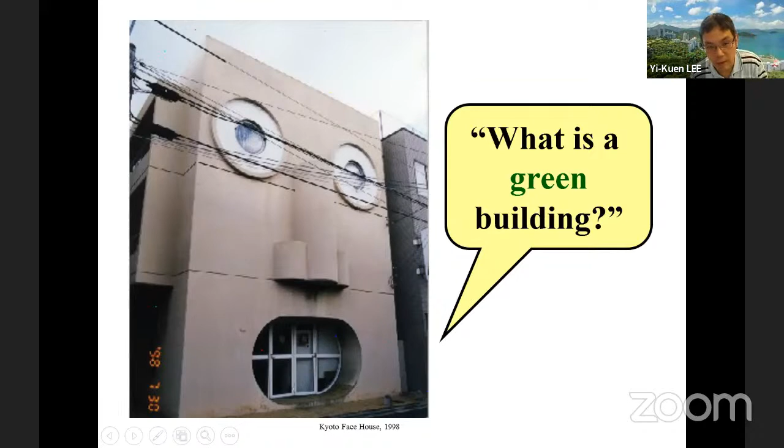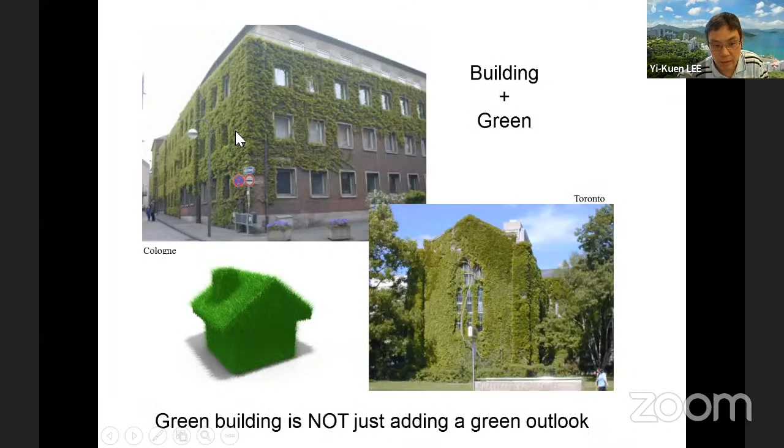Last time we briefly mentioned the green building concept, which is related to some global initiative. In Hong Kong, green building has different kinds of definitions and is sometimes misleading - it's not simply having a green outlook, so you need to address additional issues. The key issue is first to understand why, globally and in Hong Kong, the government wants to push green building.

Do you have any idea why? What's the reason? The key reason is clear.

Hong Kong has a lot of buildings. I don't know, do you have some idea how many buildings there are in Hong Kong, especially in the private sector? Any idea?

It's about 40,000 buildings, so it's a lot of buildings in Hong Kong because we have so many people - more than 7 million people living in a very small area. So we need a lot of buildings to accommodate so many people, so many companies, so many apartments.

This is non-trivial, and buildings consume a lot of energy and also use a lot of raw material from the earth. So it's quite important to think about green building from the viewpoint of the global warming problem.

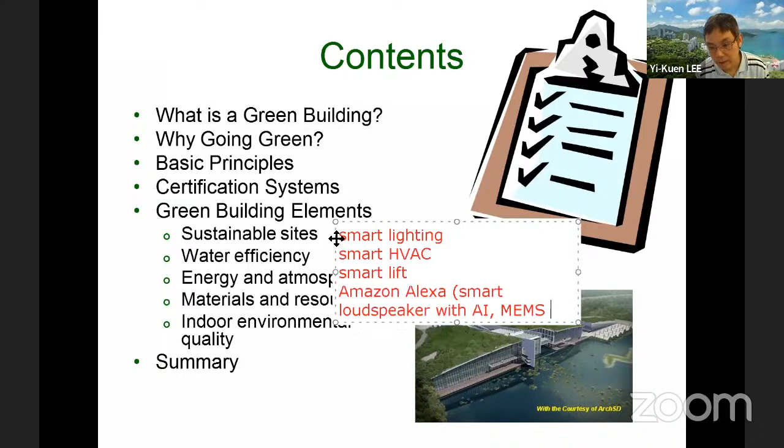It should be much more practical for you to think about this. As mentioned in the previous lecture, we have smart lighting, smart HVAC, and smart elevators - which is important in Hong Kong. We also mentioned Amazon Alexa, a smart loudspeaker connected with AI and a microphone. All this can be quite useful.

Of course there's another thing to mention. Green building also comes with the additional issue of using green material, and during construction, using much less energy and creating much less pollution. All this will be quite important for us to consider in green building design.

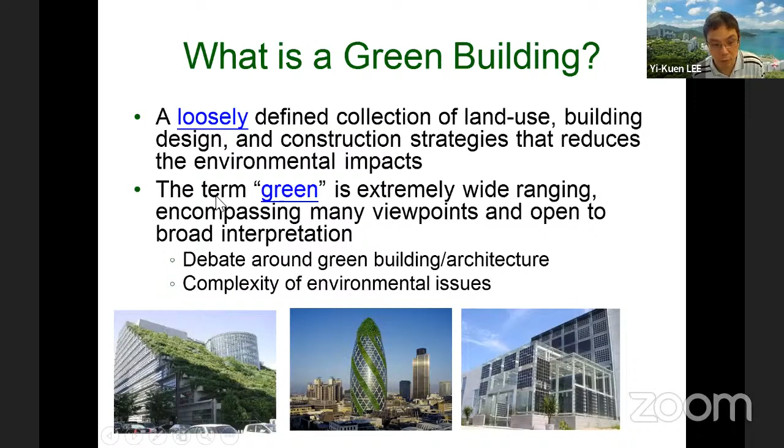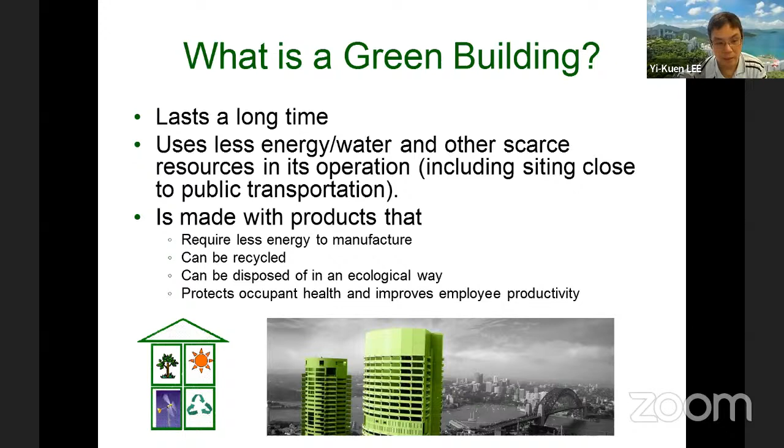Of course, we also mentioned that green building means using less energy, less material, or green material to build the building. Another issue is if your building is much more reliable and can last a much longer period of time, it can also reduce a lot of waste. This is also quite important.

So in general, a green building has a slightly different focus compared to smart buildings. Still, similar to smart building, we focus on how we can use resources - electricity, water, and even building material - in a more economic, cheaper, and efficient way. We also focus on life cycle design and human well-being, meaning the building should also be more healthy. This, along with energy efficiency, is also quite important.

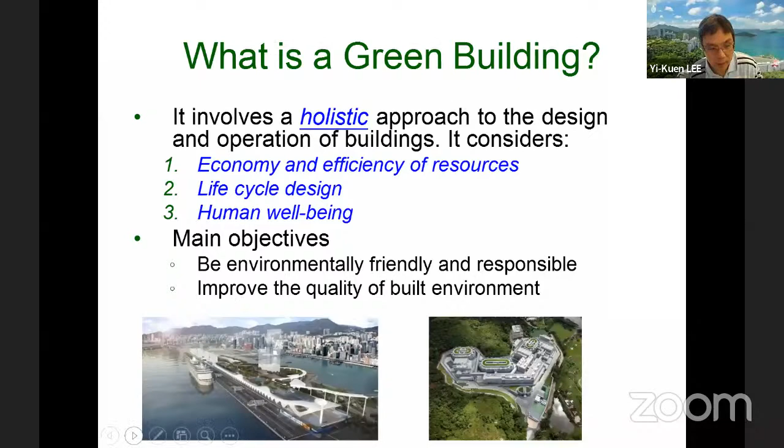In general, these several topics are quite similar to our smart building lecture, but this one is a little different - we most likely want to use more green material. For example, rock filling, or rock fill concrete, is more green material and eco-friendly. Then we can think about how to make the design a little more flexible for long-term reliability, and another aspect is how we can make it more user-friendly for building engineering.

So this is probably better achieved by using this kind of ICT technology. Why? Those kind of things are similar to what we mentioned in the previous smart building lecture, right? And finally, of course, we can also think about this kind of thing.

So how can this green building be useful to increase productivity? Productivity of people working in this kind of building, for manufacturing, or for some company work, or a project. Productivity in a school, what is it? We hope that our school building needs to increase productivity for you, so you can have more productivity to study, more efficient study and learning. Enhance the learning efficiency, so that's also quite a different thing.

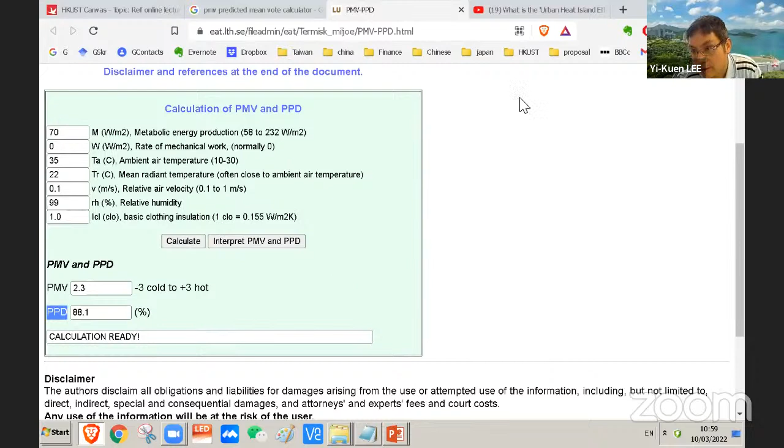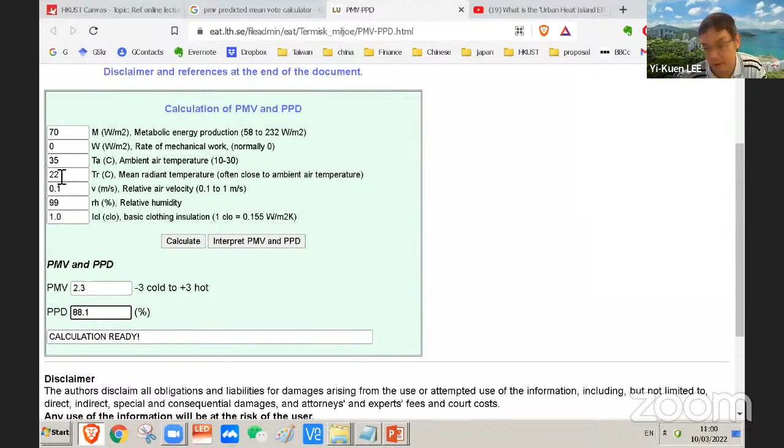PPD is another thing to consider, because when we look at human thermal comfort, what's the problem? Everybody may be different. The PMV is an empirical model based on about 1,000 people - human experiments with different conditions, different temperature, humidity, and many factors, resulting in this nonlinear human thermal comfort model. With 1,000 people under the same parameters, some people will feel okay and some will feel it's not comfortable. So PPD basically tells you the percentage of people who will be happy or not happy about this indoor condition.

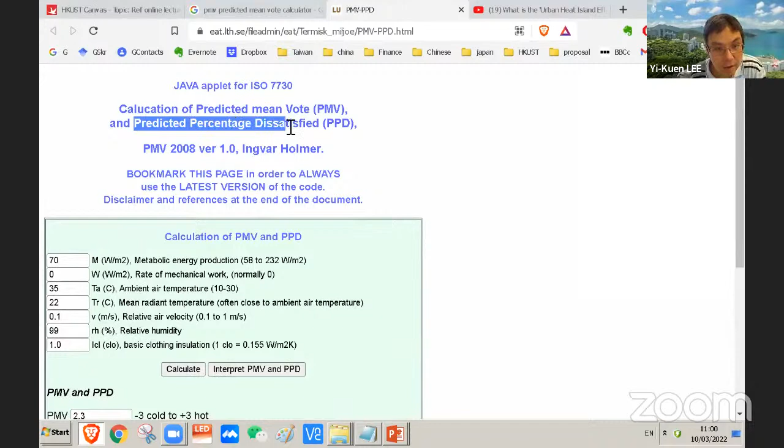This gives you the predicted percentage of people dissatisfied - whether they are satisfied or not. For example, with 24 degrees and 50% humidity - this is what EMSD, the Hong Kong government, typically recommends, 24 degrees. But humidity also matters - in this case we have a much smaller percentage of people who will be unhappy.

If PMV ranges between plus minus 0.5, I would say that's a good design. With plus minus 0.5 PMV, most likely you feel comfortable. So this gives you a more quantitative way, and this is related to the industry standard.

PMV, the American Society of Heating, Refrigeration and Air Conditioning Engineers standard. This is one of the standards, and there's also an ISO standard. It's an industrial standard, I would say.

But unfortunately, if you want to measure this kind of PMV, I told you we need to buy more than 20,000 of those kinds of instruments from Italy. And if you try to get this kind of PMV instrument from Germany, it's about $40,000 Hong Kong dollars. So it's very expensive. I do think it's impossible for every building to have this kind of very expensive PMV instrument.

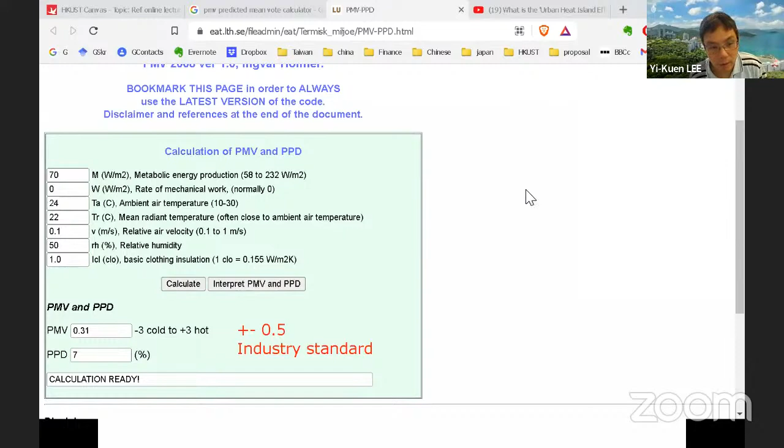That's why it's quite important, as I showed you, to come up with a much more low-cost way to look at this issue of human thermal comfort. This looks simple, but in reality it's non-trivial. It requires a lot more engineering to make it a more low-cost way.

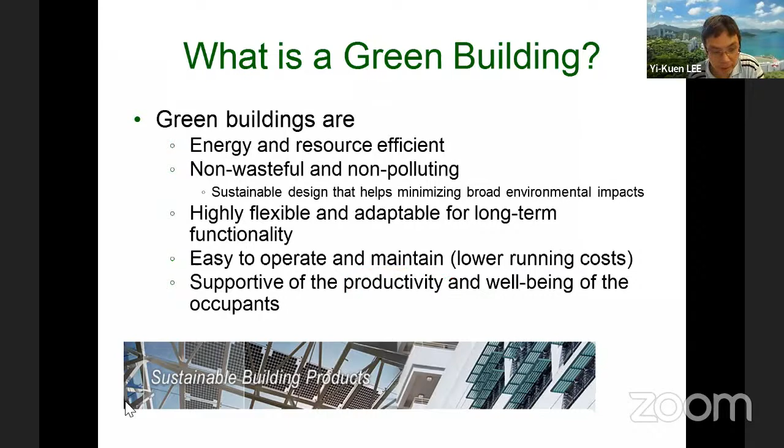Anyway, here I just provide some additional information for you to think about. Of course, especially in Hong Kong, without an air conditioning system, especially in summer, I do think it's very difficult for you to survive. Too hot. Think about if we have no air conditioning system. When you study in our classroom, what happens in summer? It's too hot. That's why it's quite critical now for buildings to have proper indoor environment control.

And of course, another thing we mentioned, green building has another quite important aspect in general. Why? We need to understand first how we can look at this kind of design which can be more sustainable. For example, you pick out the right place for the building.

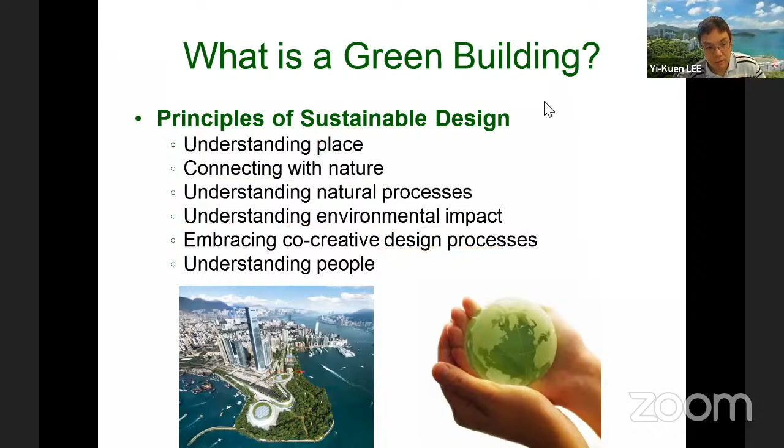And then hopefully it can be close to nature. Also, when you do the building engineering, design, and manufacturing, you will not have a big impact or create big pollution. And then you create some good design. If you come up with this kind of good design, it will be much better for this kind of green building.

Of course, typically, as I mentioned, we are in a very difficult time. We have too many people - human population increased like crazy, as in our previous lecture. Like exponential increase, and we use a lot more of this kind of resource of the earth. So we're going to have a big problem about water shortage and air pollution.

And also we use too much this kind of air conditioning system all day. Those air conditioners use a special kind of working fluid, and it's not good for the earth - it creates global warming. That's why air conditioner industry gradually tries to use more environmentally friendly liquid, chemicals which will not create CO2 and global warming.

So sometimes all this technology - humans create many technologies, sometimes good, sometimes bad. 100 years ago, humans invented this kind of air conditioning system, and at that time we didn't know. We used some special chemical to make the air conditioning system's working fluid, so we didn't know this kind of thing could really create big trouble for the earth. Gradually, we found we have too many air conditioners generating this big problem for global warming.

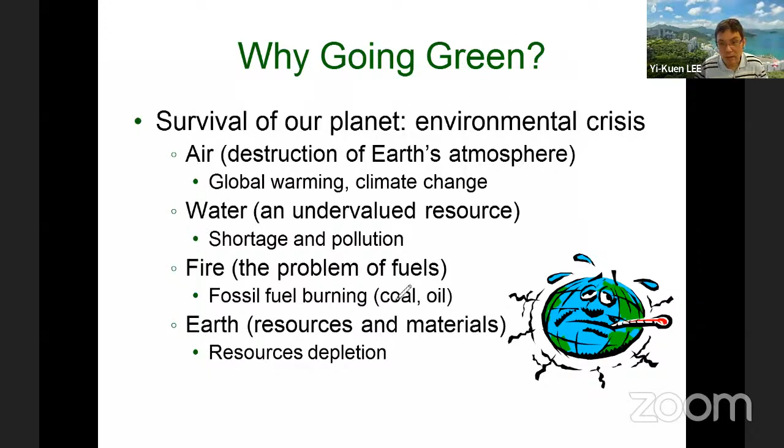As I mentioned, we not only need eco-friendly green materials, but during construction we may also generate a lot more problems, such as air pollution, which is sometimes very bad.

Once you have a lot of air pollution, the worker may develop some disease. Unfortunately, some materials during construction may cause big problems for the health of construction workers. This is another quite big issue for our engineers to think about.

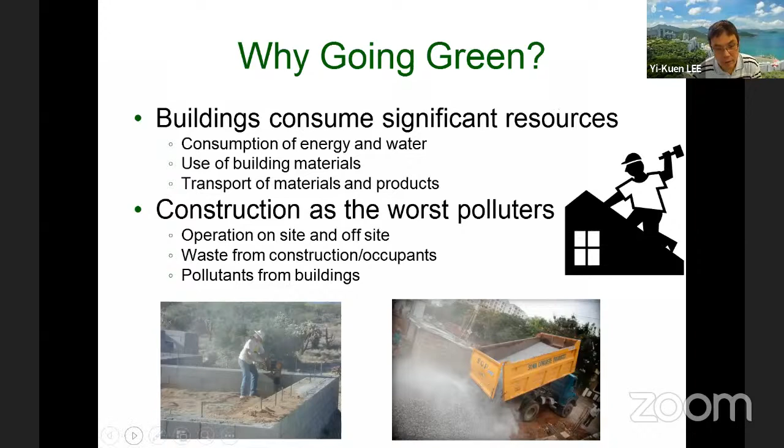There's a lot more issues we need to consider, but in general, I think we want to be first energy efficient, more healthy, and minimize those problems.

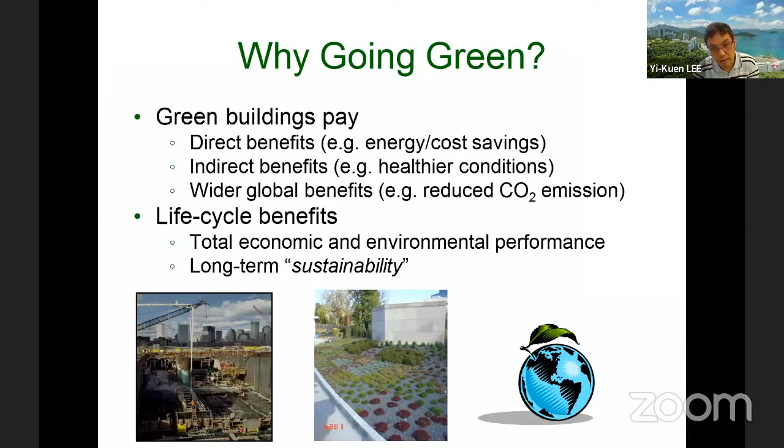I think we also want to highlight this part. You'll be surprised that building engineering globally consumes about 40% of raw material - a huge number, 3 billion tons. This is something quite amazing. It also uses a lot more energy, and all this becomes so critical.

That's why globally, almost all the governments in the world - many countries - try to promote green building. So it's not only like Hong Kong.

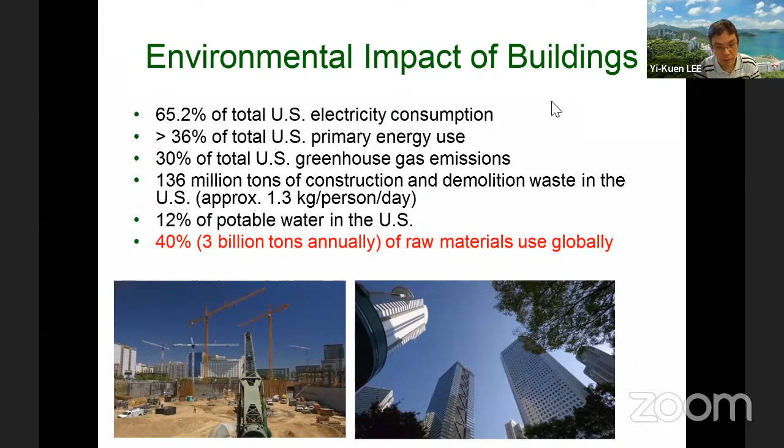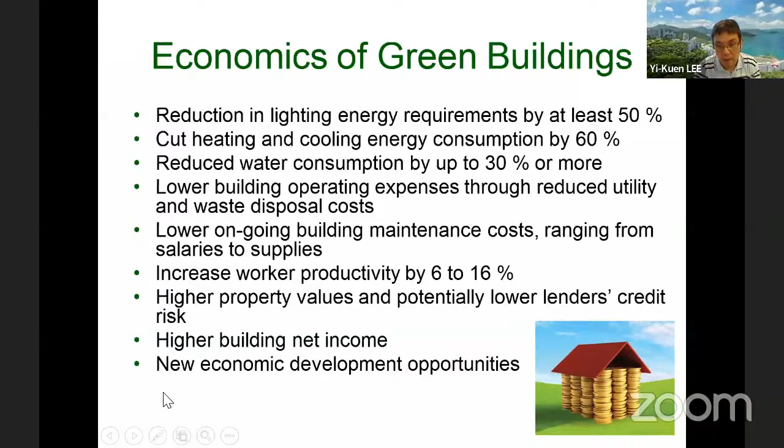We will not give you a lot more detail, but in general, the key thing is we need to think about how we can have more and more green buildings. Typically there's a set target for green building initiatives, or there's also a green building certificate. The hope is the green building design can achieve energy efficiency, energy saving of about 20 to 50%.

Also minimize CO2 emissions, on the order of 30 to 40%, and reduce water consumption and solid waste by 70%. This is something gradually - the industry and government have certain requirements.

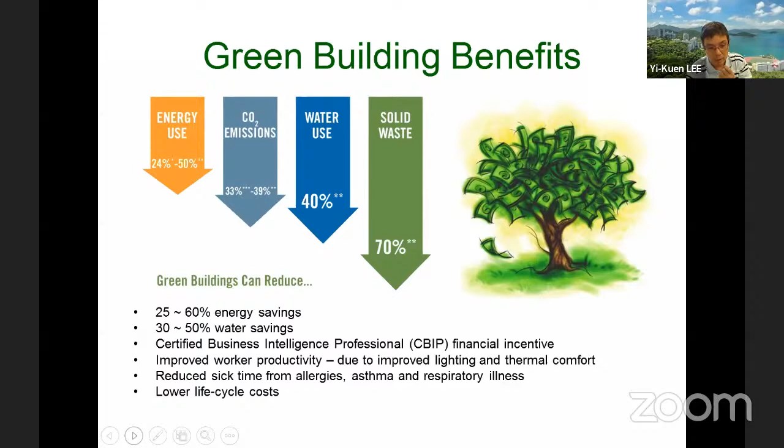Although the government wants to promote green building, like Hong Kong government providing big money, what's the problem of how you can let more buildings become green buildings? What do you think?

Hong Kong provided $200 million. Can every building in Hong Kong become a green building? What do you think? It looks like a big amount, but in reality, how much does one building cost? This is still a very difficult thing to say.

Although the government wants to push green building, what's the problem? Sometimes if the building has existed for a long time, the business owner may be too lazy or doesn't want to spend money to turn a traditional building into a green building. That's one of the barriers. If you don't provide incentives, tax reduction, or additional funding, there will still be barriers to promoting green building.

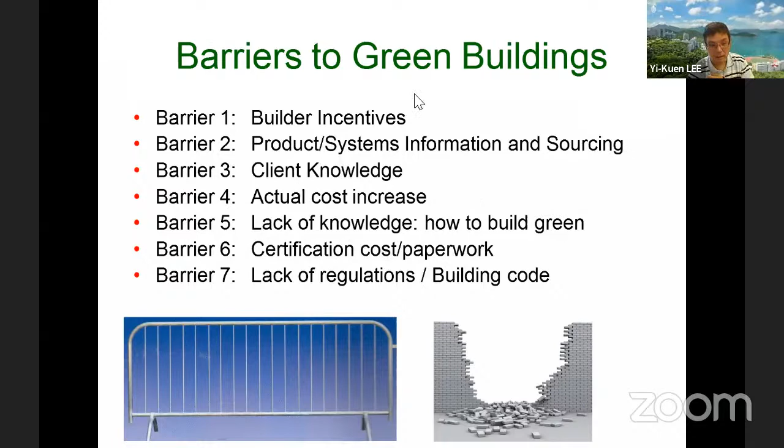We already showed this in a previous chapter. If you look at a building as a system, there's a series of subsystems inside, so in terms of mechanical design we want to use more green, eco-friendly material, like the rock fill concrete we showed you. And if you look at energy supply and water supply, these things are quite important to think about: how can we come up with a more green design?

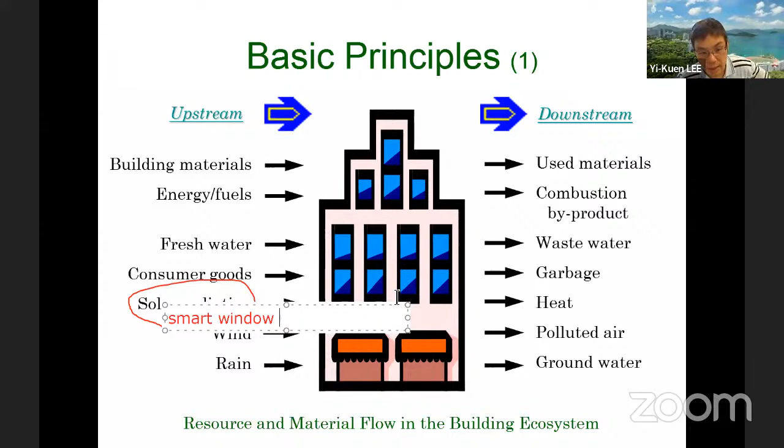And if you look at the solar radiation issue, we may want to think about using special material for windows, maybe smart windows, so it can really take advantage of solar radiation for lighting and minimize electricity consumption for traditional lighting. So this means we may want to think about how to make a special kind of smart window using new smart materials that can react to solar radiation, so it can take better advantage of solar radiation and consume much less energy.

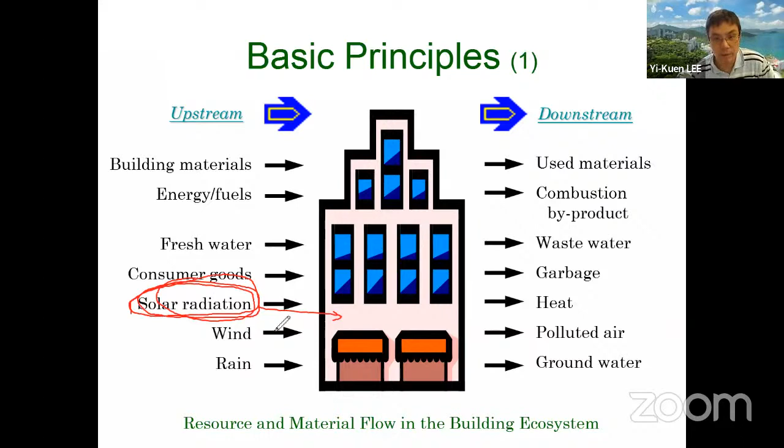And how about wind energy? What do you think? Actually, some tall buildings may also try to use wind energy. For example, if you have a wind turbine in a very tall building, you can use the wind energy to power some electrical appliances inside the building, which is quite useful.

In the old days this may have been difficult, but now with much more sophisticated wind turbine design, I'll show you some examples of how some very tall buildings really try to install this kind of wind turbine. Of course, you can also think about adding solar panels to get that energy.

So all this, I would say, is quite like solar panel technology, to generate electricity from solar radiation. All this can be quite useful and important.

And of course, another issue in green building is once you have output, how you can try to minimize pollution - wastewater, waste heat, and polluted air and groundwater.

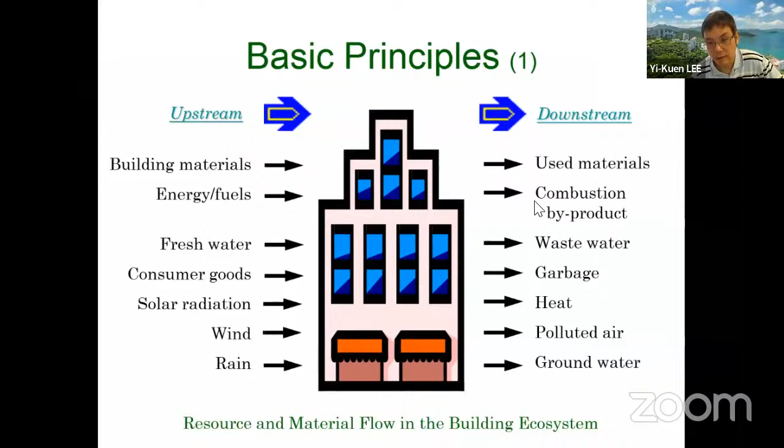This is also quite important. Some of this may need a lot more engineering consideration to minimize this kind of pollution problem.

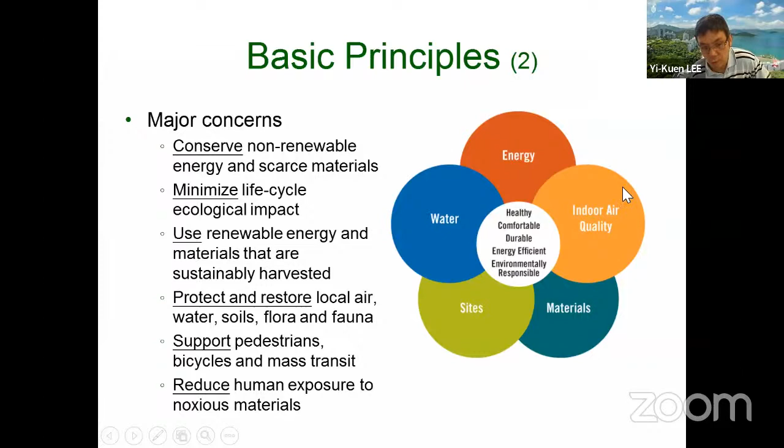And here in general, as I mentioned in our previous lecture, for all buildings we have to consider subsystem design - our building energy system, water system, air conditioning system, and a lot more of the building management system (BMS). So we need to think from a systems engineering point of view to look at how we can come up with green building design, engineering, and construction.

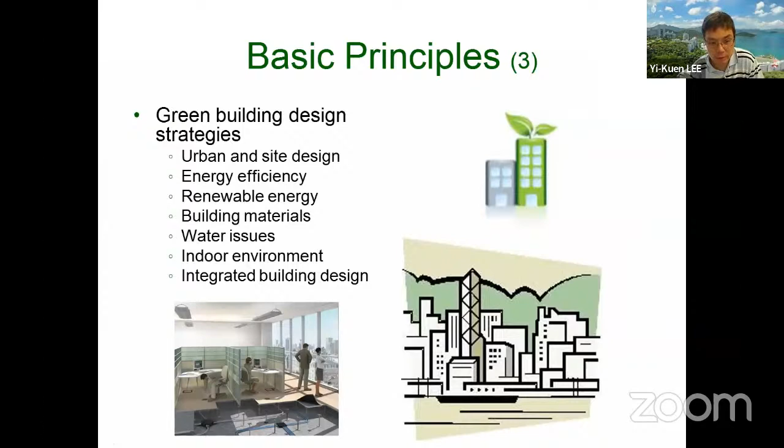I think this is something we've mentioned in general, we shouldn't talk too much about it, but we can talk about another quite important issue. When we talk about green building, we need a more quantitative way to describe it - what kind of building can be classified as a green building?

Different countries and regions have different initiatives. In Hong Kong, the government promotes BEAM Plus. In other parts of the world, like the United States, there are other organizations like the California Green Building Code and USGBC. So different parts of the world have different ways of certifying green buildings, with different standards.

I can also share with you about this. In Hong Kong, we have our own government requirements and suggestions, so let me show you. There's one NGO in Hong Kong that tries to promote this kind of green building certification, which we call BEAM Plus, from the Hong Kong Green Building Council.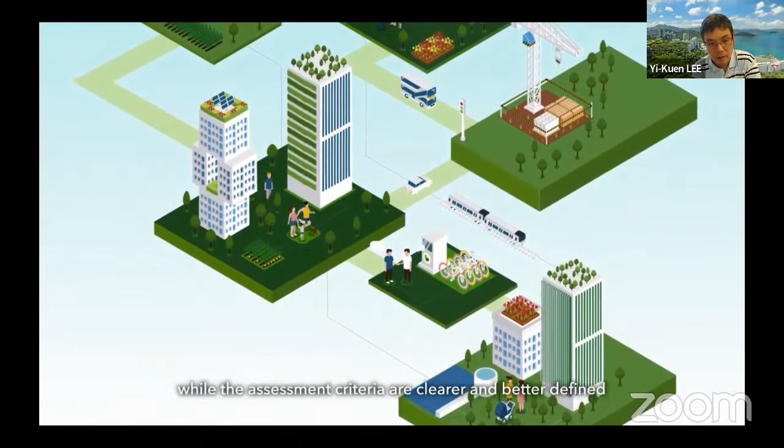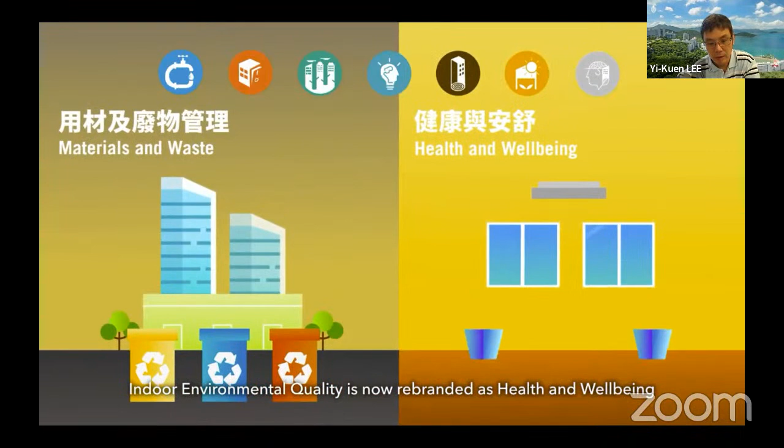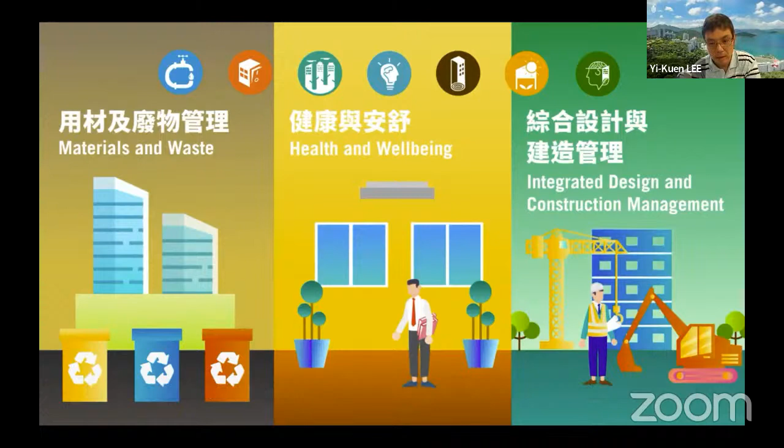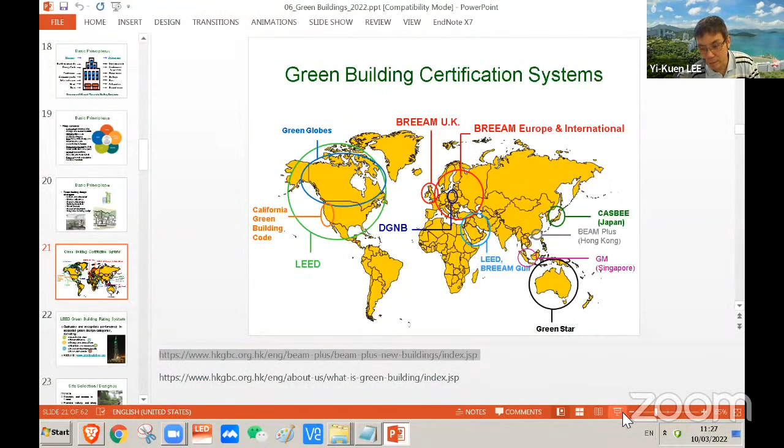It's quite useful for you to look at it from the Hong Kong government's point of view. What's the typical certification? This gives you a little more introduction, because at least here in Hong Kong, I think it's quite important for you to understand this from the Hong Kong point of view - what's the typical certification.

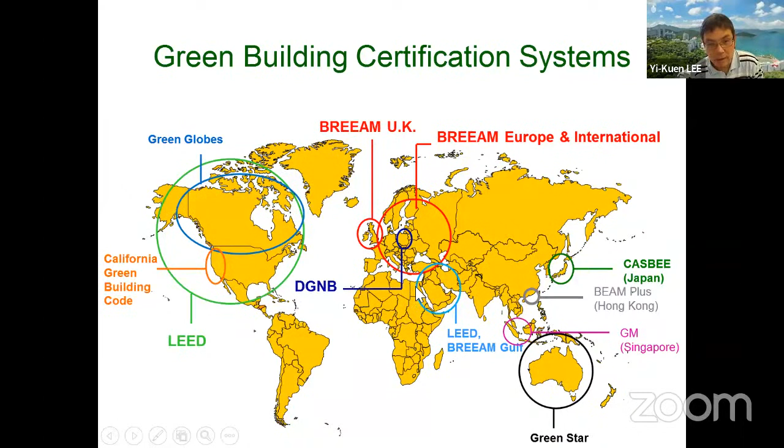So BEAM Plus is one. Of course, there's other green building certification systems, and LEED is another quite common green building rating system globally. Even in Hong Kong, some big industries will also want to look at this kind of LEED system to promote.

Why? Because at least internationally, this one has been used a lot more by people and industry.

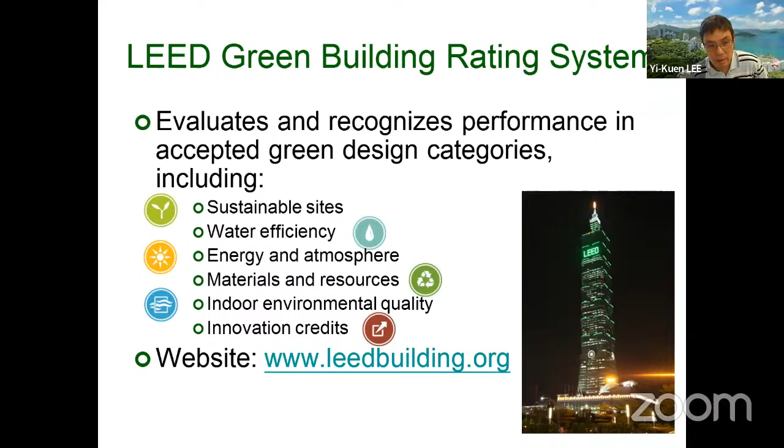Okay, and of course there's another important issue for green building, as I mentioned: how you can pick up the right place for the building engineering. If you can pick up the good place, you may save energy. For example, if you choose an area close to, say in Hong Kong, the MTR, people inside the building can easily take public transportation, which can really save energy and reduce CO2 emission. If you are very far from this kind of public transportation service area, then you most likely have to take a taxi or drive a car. So this is something quite important.

So one additional aspect of building engineering is what's the other issue? We need to think about stormwater. Especially once you have a big rain, stormwater may cause a big problem for additional pollution.

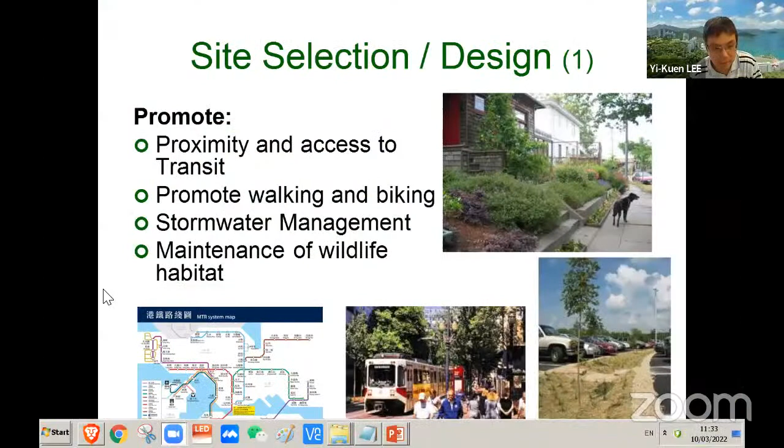At this moment, you can see COVID-19—how many people have died, how many got this virus, creating big trouble. So from my point of view, green building is not only about saving energy, being cheaper, and creating less pollution, but another important issue is how green building can help us live more harmoniously with wild animals, so that it will not create big trouble. This is something I see as quite important now.

And of course there's another issue: if we choose a proper location for building engineering design and construction, we can also minimize problems like soil erosion and a lot more stormwater runoff. This is another important engineering issue.

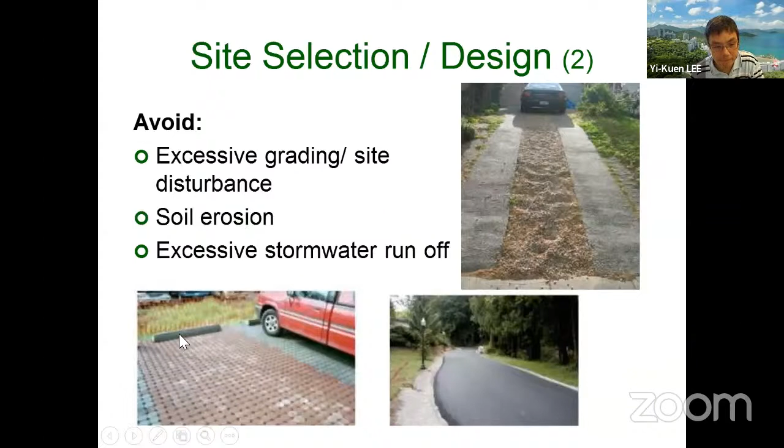One additional thing when we look at the selection of location for this kind of building engineering design: first, we need to make sure we avoid areas like farmland and sensitive habitat, which are areas for wild animals.

Another thing is, if we have too many buildings in a big city, what's the problem? Too many buildings can create a heat island effect, making things much hotter. Once so many buildings are put together, it can create big trouble. In recent years, many big cities have suffered this heat island effect. So what is the heat island effect?

I think there's an interesting video here. Basically, once there are a lot of buildings, solar radiation from the sun heats up all the buildings. Locally you get a lot more heat accumulating among so many buildings, and this changes the wind circulation, creating this big problem.

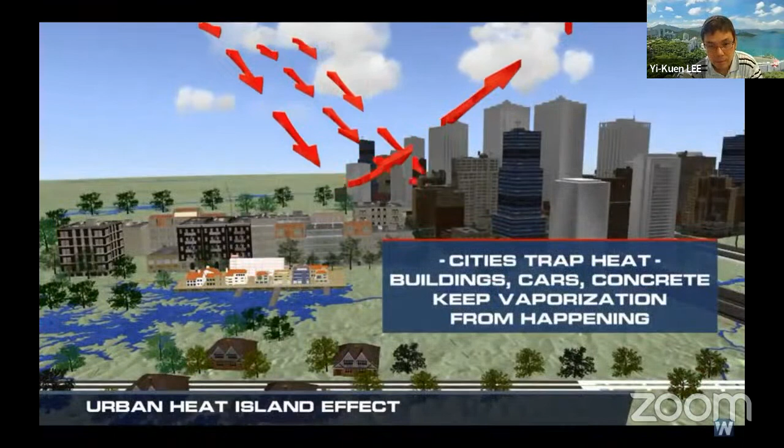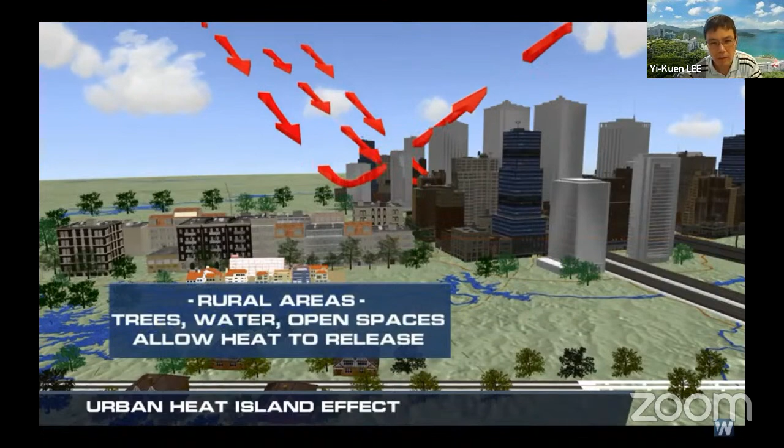Heat is the #1 weather-related killer in the United States. During extreme heat events, urban areas are at higher risk for impacts. The physical makeup of cities causes their temperatures to be hotter than their surroundings, a phenomenon known as the urban heat island effect. During the day, the sun can warm buildings, streets, roofs, and cars 50 degrees or more hotter than the air around them. Unlike their rural counterparts, the building materials are dry, limiting evaporative cooling. At night, these materials release heat at a much slower rate. On average, a city with 1 million people or more runs about 2 to 5 degrees hotter than its surrounding area.

This gives some quite important message, right? For big cities like Hong Kong, we have a lot more buildings - more than 40,000 buildings in the private sector. Especially in summer, we have a lot more solar radiation, and that solar energy is absorbed by the buildings. During nighttime, that solar energy is released from inside the buildings, so you feel much hotter.

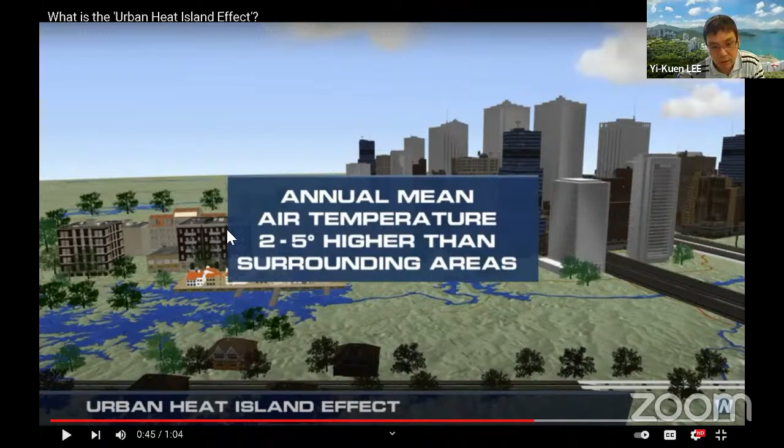This can sometimes be very difficult, right? It becomes worse - the hotter it gets, the more air conditioning you use, so you consume more energy. This becomes one of the big issues. So what do you think? Can we really minimize this kind of heat island effect problem?

What do you think? How do we avoid this kind of problem? This is for us as engineers. If you understand this basic phenomenon - the heat island effect is solar radiation hitting the buildings - how can we minimize this problem? Of course, the problem isn't just one thing; you have too many buildings, so it's a building question overall.

I don't know, do you have any ideas? Oh, we have some students already describing ideas - good, we have several. One student mentioned how we can maybe decrease the density of buildings, and also green rooftops. Very good - if you have additional green plants on top of the building, then we can try to use that.

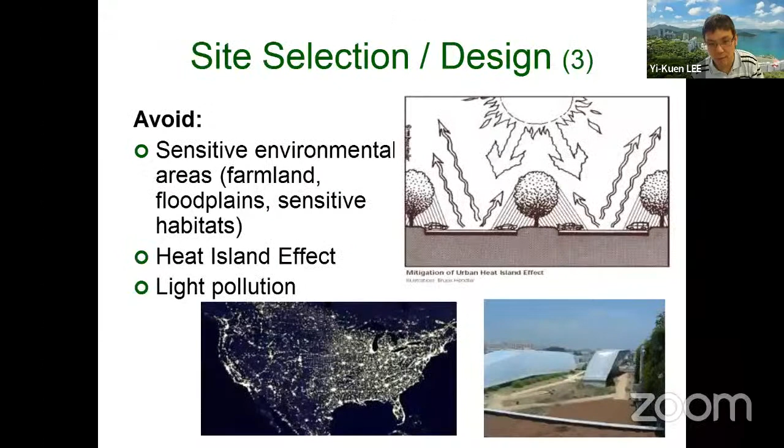This is something quite important for all of you to think about. Here I show you a typical example: why the heat island effect happens. If you have too high a density of buildings, the temperature will be different—higher than the other area, which may be rural countryside.

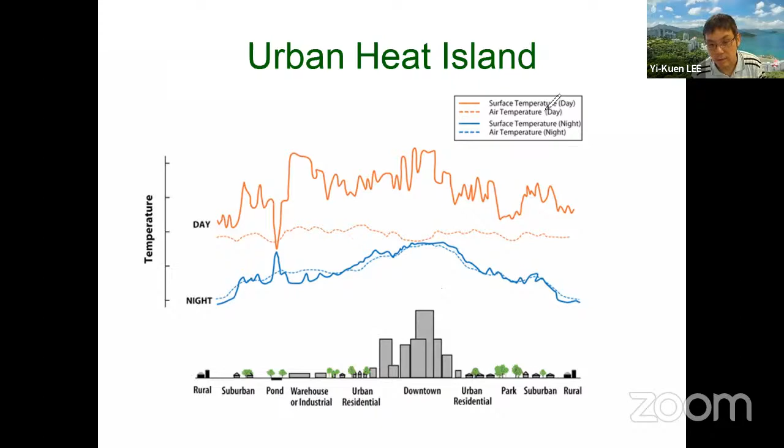So non-green design is a heat island design issue. The key thing here is we need to think about how we can solve the problem. What we talk about here is one solution—no problem, right? Another thing is maybe installing some reflective coating or something, so you can reflect this kind of solar radiation.

And one more thing, as I mentioned, you may also look at smart windows. With smart windows, we can leverage and adjust the optical transmission efficiency of the window, so that it selectively lets solar radiation pass through, or some of it gets reflected. This is definitely a quite useful way to think about green building design, to minimize the heat island effect.

I can also give you some reference about a project. I worked with EMSD, and I discovered that the Hong Kong government has this kind of initiative, and one government building uses this kind of smart window to enhance this.

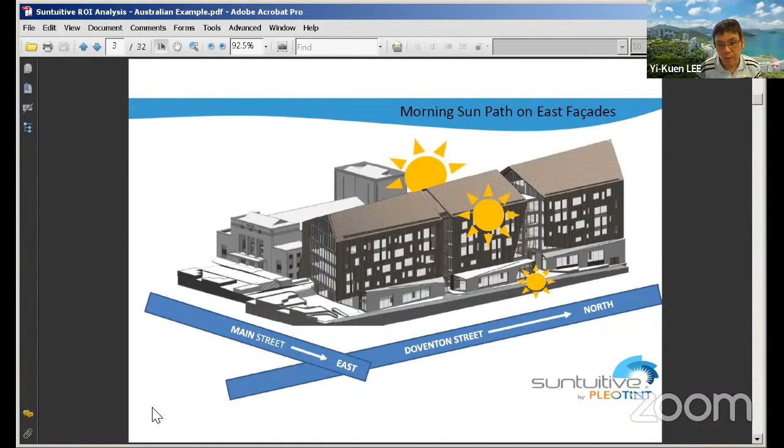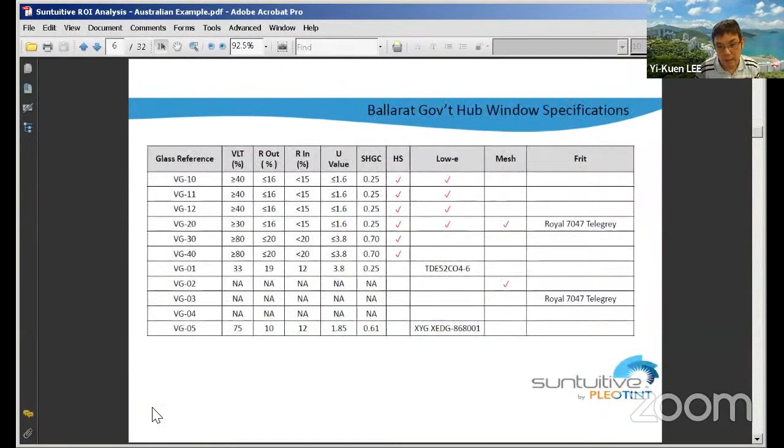Definitely, again, there's no free lunch. This smart window approach is much more expensive—at least 4 times more expensive compared with traditional windows. But if you look at how you can save energy, it's really important to find the ROI, to think about whether this can be useful in the long term to save energy, and also minimize the problem of global warming.

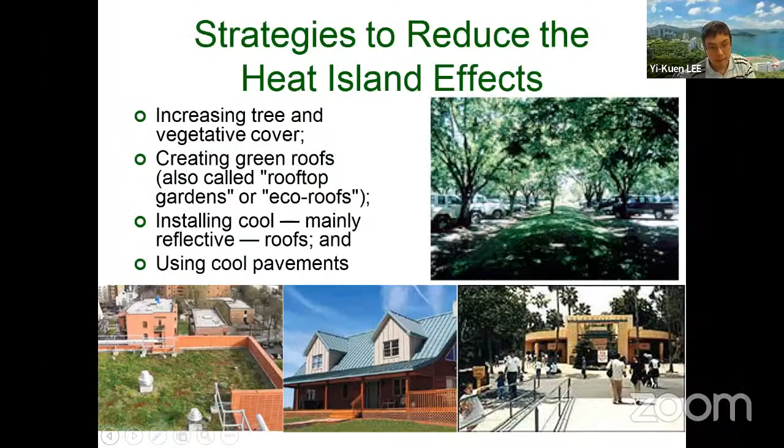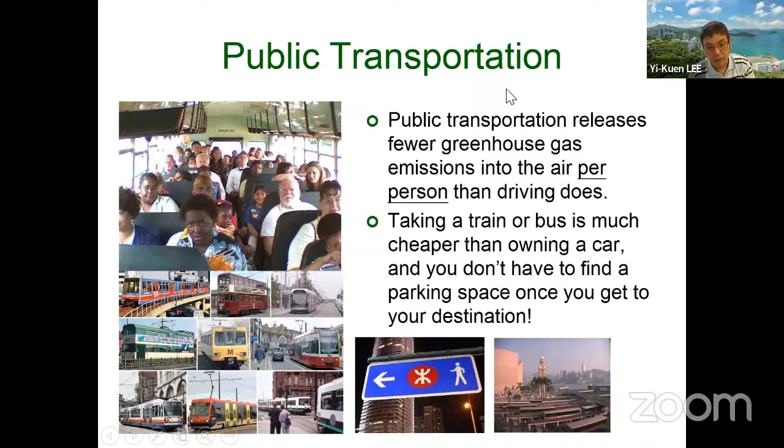So definitely I'd say this is something important. Engineers need to find some balance in this. And of course, for green building design, if the location of the building is close to public transportation systems like MTR, then you can also reduce energy consumption.

One additional thing, since we're almost running out of time, is the stormwater problem. So what is stormwater? Stormwater typically occurs especially when we have rain. Some rain falls and hits the surface of the building, and then this water goes down to the ground, and then what happens? This ground may cause some problems.

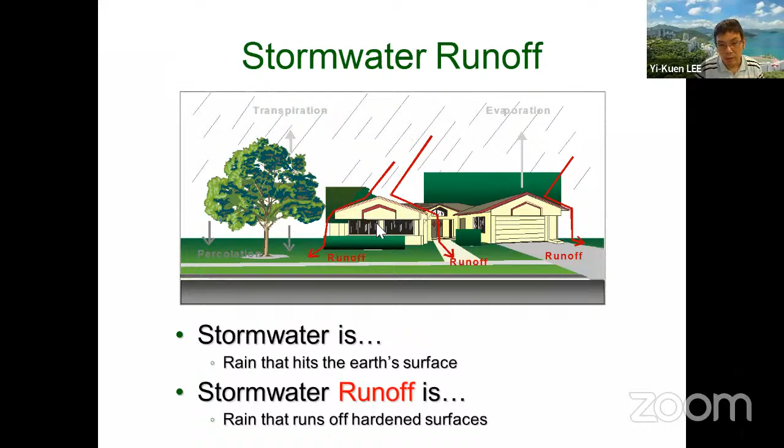Especially what we care about is that it can cause pollution. This is one big issue—how can we think about this kind of groundwater pollution problem? This is definitely one of the big issues. So once you have this stormwater issue, you can really cause water pollution, and degradation of the foundations near the building. So there's a series of issues with this stormwater problem.

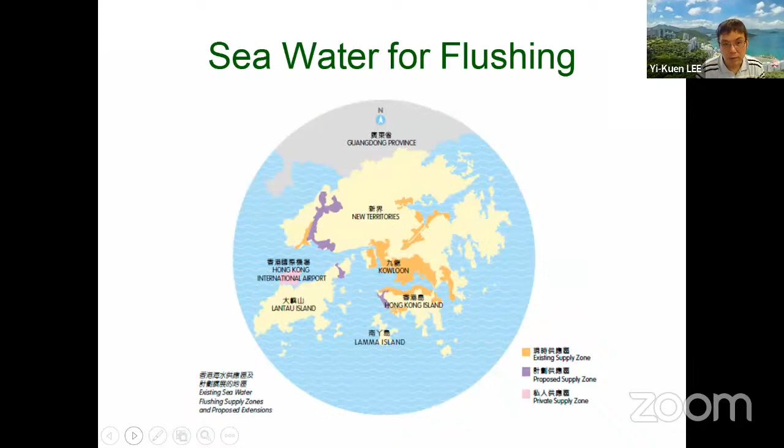I think we've almost run out of time today. Again, today we focused on green building, selected some key concepts, and showed you some examples of green building. But of course, as I showed you, at the end of the day there's no free lunch. When you push certain green building engineering aspects, we need to make sure the other aspects of building engineering design are okay. So this is, I think, quite an important issue.

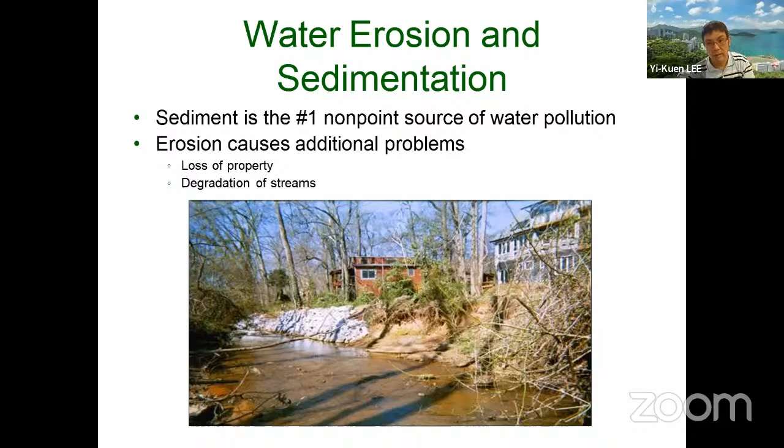Again, do you have any questions or comments on today's lecture? I'd say this example of CityU is one good example—green building is good, but you need to think about more. You may need certain considerations of the building design, to make sure you don't create a collapse of the building that could kill a lot of people. So this is one of the important issues for engineers, to find a balance among building performance, efficiency, pollution issues, and also other things like environmental friendliness and eco-friendly materials.